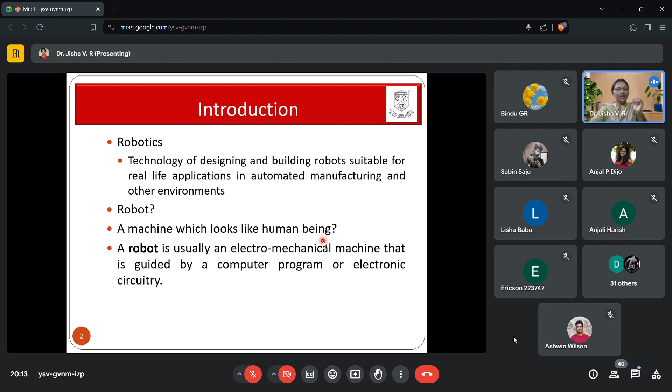So what is basically a robot? Generally, when we are in school, when we are beginners in robotics, what comes to our mind when we hear the word robot? Is it a machine which looks like a human being? In my school days, when I heard the word robot, this is something which came to my mind. Okay, so it's only a humanoid robot like that. So this is basically only one class of robot.

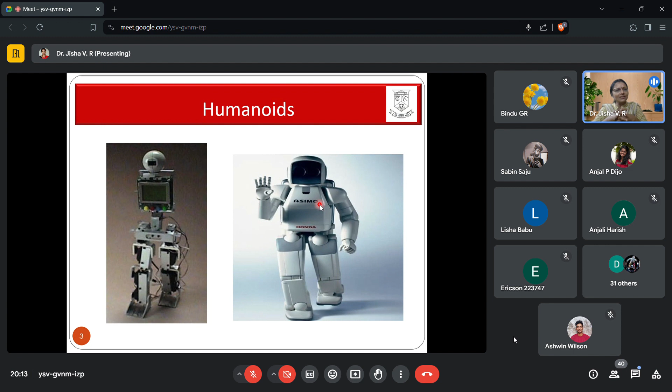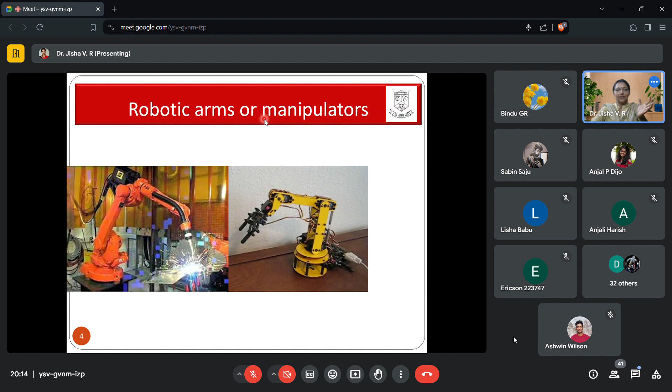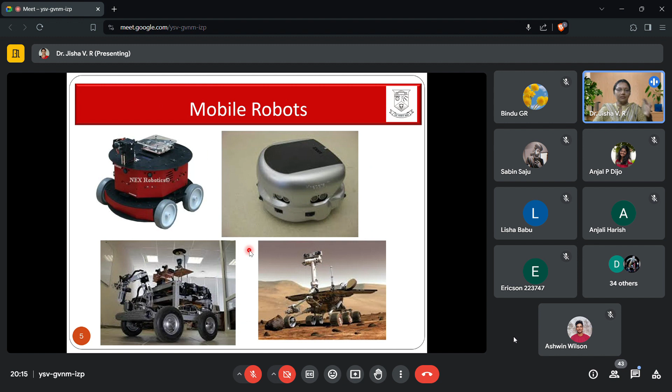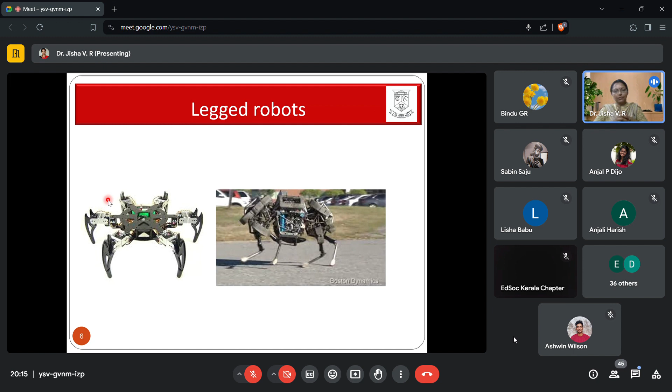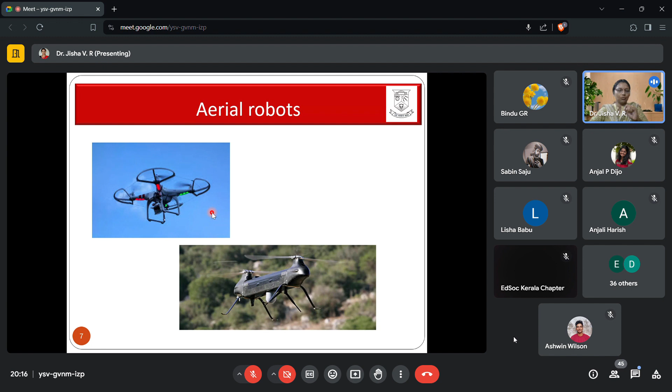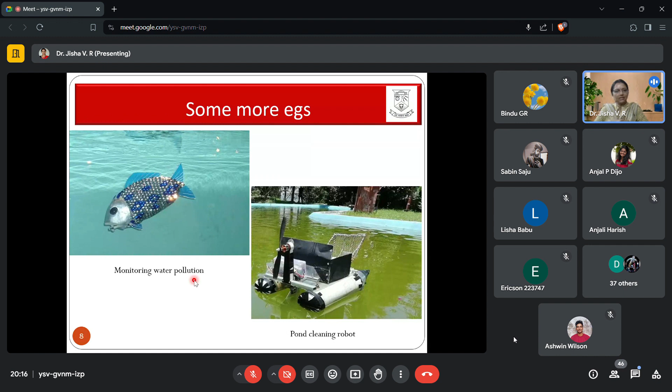Okay. And this is the last group of robots which I have included in the presentation, the robots which are moving in water. This is actually a pond cleaning robot which is moving over the surface of water, but it can go deep inside and do some analysis or monitor water pollution. So what I wanted to convey is that not all robots are human-like. There can be configurations like these, and many more configurations as well. I have not included all the robotic configurations. Okay.

So what is basically a robot? In simple terms, we can say that it is an electromechanical machine. It has a mechanical structure, and we will write some program, or there will be some electronic circuitry which is used for controlling this robot. This robot can be semi-autonomous or it can be autonomous also. If we are using only electronic circuitry, it will be semi-autonomous, but using computer programs, we can make this a fully autonomous robot.

So where has this word robot come from? It has come from the word robota, a Czech word which means forced laborer. If you look at the robotic population worldwide, they are all used as laborers, and population wise, what do you think? Can anyone say? I have shown different robotic configurations, right? Starting from humanoid, then the manipulator, then wheeled mobile robots, legged configurations, and the robots which are moving in water. Among these, population wise, which one is dominating? Can anyone say?

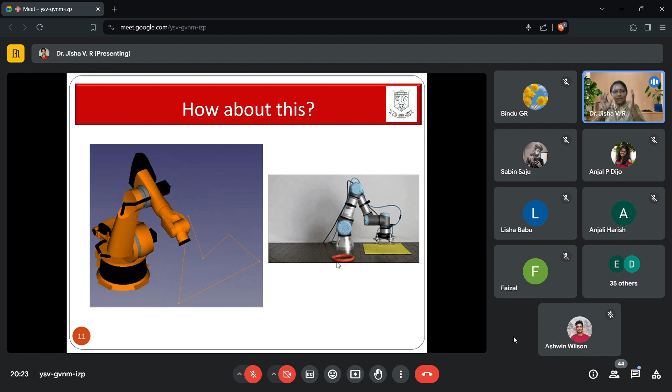So whenever we are designing a robot, if it's a robotic manipulator, it should satisfy the requirement. It should not be like that. Wherever I wish to keep the object, point A, B, C, D, I should be able to do that. So your robot should be able to do that.

Another example: this is a line follower. Many might have seen that. Many might have built line follower robots also. What generally people do is, there'll be a line marked on the floor, and the robot will be designed to follow this line. But I'm imagining a line on the floor in the room where I'm sitting. It's just imagination. There is no line over there. Will I be able to move the robot through that straight line?

And suppose I'm thinking of moving the robot through a circle, somewhat like this. Will I be able to do that without drawing a circle? You should be able to do that. Some of my BTech students did this project many years back, where the robot is moving through a circle. If you look at this, this robot is moving through a circle, and there is no circle drawn. So how is this achieved?

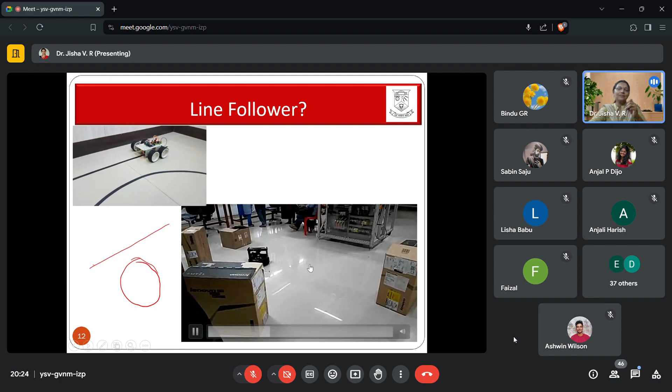Okay, so if you know a little bit of math, you will be able to achieve this task. Another common task which is taken up by UG students is the obstacle avoidance robot. What they'll do is they will generally use a sonar sensor, or initially they start with an IR sensor, or they may integrate a sonar sensor or laser rangefinder. So see how they are doing obstacle avoidance.

Suppose the robot is moving forward like this, and when an obstacle is encountered, the robot takes a right turn or a left turn. So that will be their algorithm. Is that what the robot is supposed to do? No, right? Because this robot will be assigned to do some task. Maybe the robot has to move from point A to B. While moving from A to B, it encounters an obstacle, and now it has to overcome this obstacle and reach B. So can this be done?

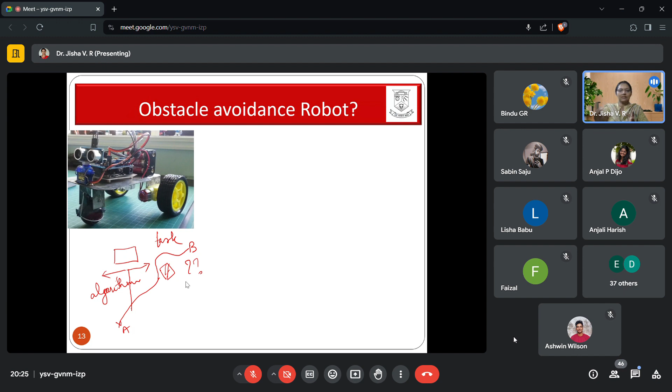That should be in our mind, rather than, when the obstacle avoidance robot is built, just taking a left turn or a right turn, wherever it will go. Are you thinking of the destination point also? Whenever we are thinking of building an obstacle avoidance robot, we should think of this aspect as well. If you look at this, this is a start point in a scenario, and this is a goal point, and there are some obstacles, but this robot is avoiding all the obstacles and reaching the destination. So whenever you are building an obstacle avoidance robot, you should also think in this way.

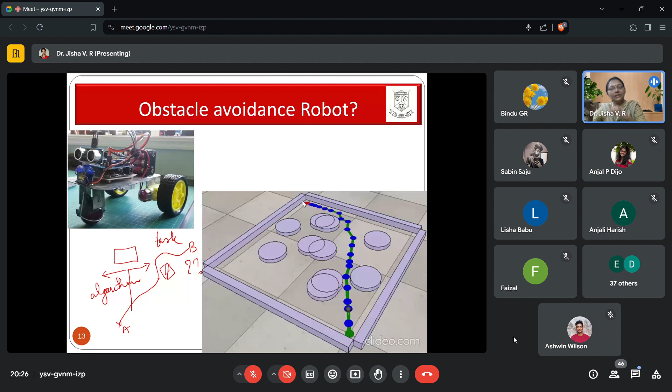And the next level is, all these obstacles are static obstacles. Suppose the obstacle is moving, then how to avoid that and move forward. All these things should be in your mind whenever you are working with robotic projects. So can we claim robotics belongs to only one particular engineering discipline? No, right? It's an interdisciplinary area where anyone will be able to contribute, whether you belong to mechanical, electrical, electronics engineering, or computer science, if you wish to work in robotics.

Now, suppose I am basically from an electrical background. Generally, I will not be much interested in the mechanical design part, or I will not be aware of that. And once the robot is available, I know how to control it to move from one particular point to another, or how it can be moved through a particular trajectory. That I will be able to do.

And being an electronics engineer, you will be able to add more sensors. Sensor integration or sensor fusion can be done, and image processing also. If you are using a camera as a sensor, that data can be manipulated and obstacle avoidance can be done. An electronics engineer will be able to contribute all those things. And a computer science engineer, whenever we come up with an algorithm, will be able to design an optimal program for controlling or achieving all these tasks. So anyone in this group will be able to contribute.

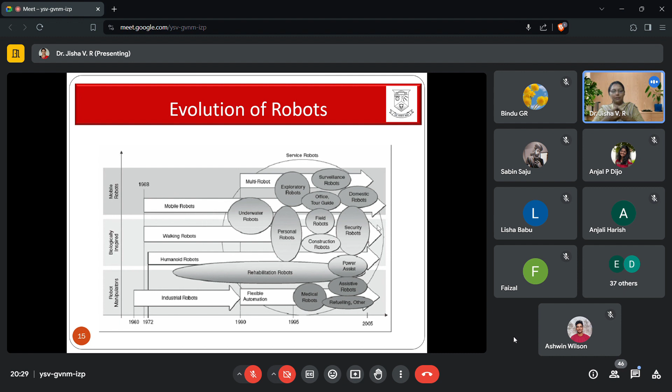I'll give you some brief about the manipulators, like what are its parts and some basic math, so that if you are interested in working deep in these manipulator robots, you will be able to do that. If you consider a manipulator or robot arm, it is very much similar to human upper limbs.

A manipulator or robot arm is generally defined as an open kinematic chain of rigid links interconnected by movable joints, meaning it is open to move. Only one end is fixed, the other end is moving, so we call that an open kinematic chain. But if both ends are fixed and the part in between is moving, then we call it a closed kinematic chain.

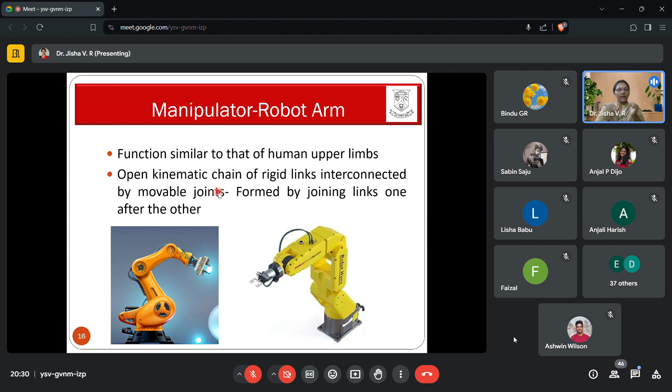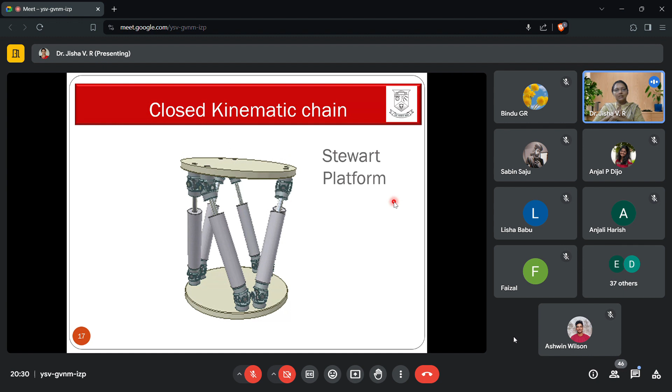This is another configuration which we call a closed kinematic chain, the very famous Stewart platform, which is basically used for simulating space-like environments. So this platform is generally used. That's the classification of closed and open kinematic chains, and some terminologies also I will mention.

If you consider a manipulator, it has links, joints, and other structural elements. End effector means the part which is connected last, the last link of any manipulator, I should say.

Actuators means which is causing the robot to move, so we call them muscles of manipulators. Muscles can be servomotors. See how beautifully we move our hand, right? But when we think of replacing this with a motor, we'll understand how difficult it is. So we can use servo motors, stepper motors, and in some cases, hydraulic or pneumatic actuators.

In the car manufacturing industry, the payload to be manipulated is a car, so you can imagine the weight. An ordinary servo motor or stepper motor will not be able to manipulate that payload, only hydraulic actuators will manage that. In some scenarios, like food processing industry, we can't employ hydraulic actuators because there can be oil leakage. So in those scenarios, we go for pneumatic actuators, which are air actuated, while hydraulic actuators are oil actuated.

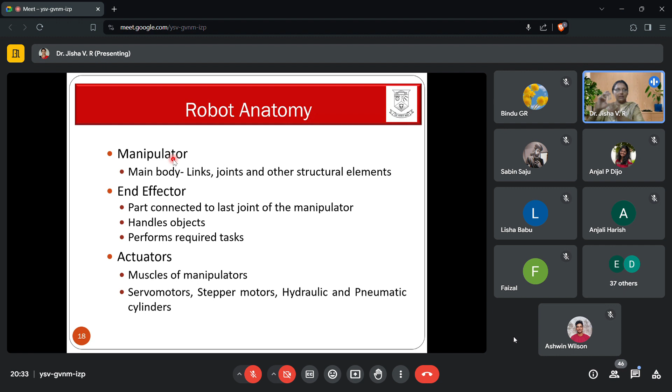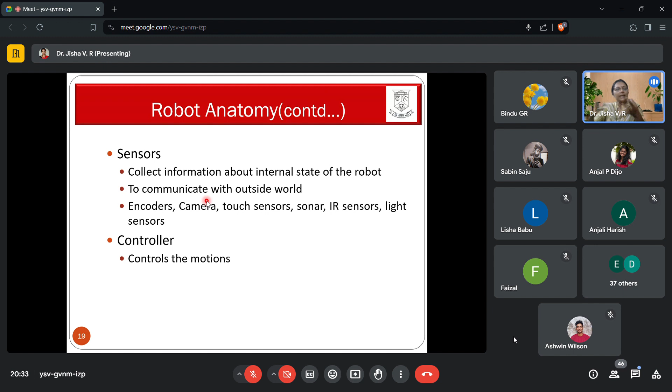Because of continuous rotation - in a manipulator, it's just theta control, just angle control: theta 1, theta 2, theta 3, like that. But in a mobile robot, the velocity of the motor is to be controlled. A mobile robot will also have sensor control. So sensors, controller, and actuators are common in all the robots we work with.

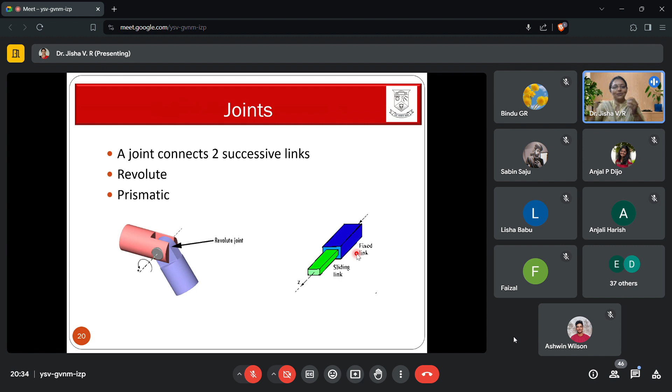In a manipulator, as I was mentioning, there are links and joints. The joint connects two links, and there are two types of joints: one is called revolute joint, another is called prismatic joint. Revolute means all our joints in the body are revolute joints. Prismatic, in some applications we may need robots with that, but for us, all the joints are revolute joints only.

And these are some terminologies, standard terminologies if you wish to work with robots. The first one is work envelope, meaning it is a locus of points in 3D space where the end effector can reach. This is very important - the robot is going to do pick and place, so is it going to work inside a rectangular box?

Is it going to work inside a cylindrical envelope? Or is it going to work inside a spherical envelope? You should have an idea, because suppose there are parts which are moving on a conveyor and the robot has to pick and place at some point. Where the arm is moving, you should have an idea. What should be the work envelope? Should it be a sphere? Then what should be the robotic configuration? That is how you decide.

Based on the application you are working with, you need to choose that particular robotic configuration. And how the work envelope looks like is decided by the first 3 joints, or major axis of the robot, and the remaining joints are called minor axis of the robot. So how the work envelope looks like is decided by the major axis.

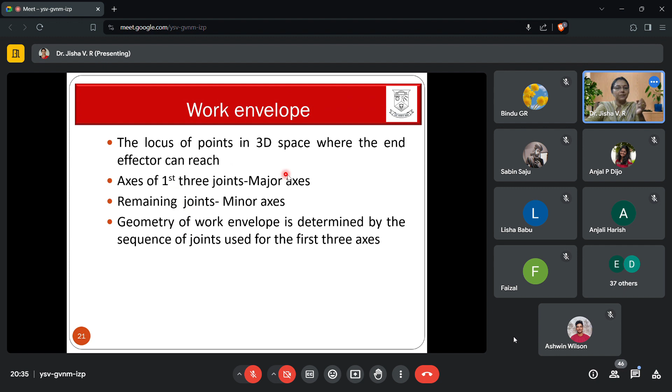These are the common configurations. This is a rectangular box-like work envelope, meaning the end effector will be able to move within that rectangular box. This is a cylindrical configuration wherein the robot end effector will be able to move within the cylindrical envelope. This is called spherical, and this is called articulated.

So if you want a box-like configuration, we go for this robotic configuration, which is called Cartesian, PPP we call it. The next one is cylindrical configuration, which is revolute prismatic prismatic, yielding a cylindrical work envelope. Next is spherical, which is revolute revolute prismatic. And the last one is articulated, meaning RRR.

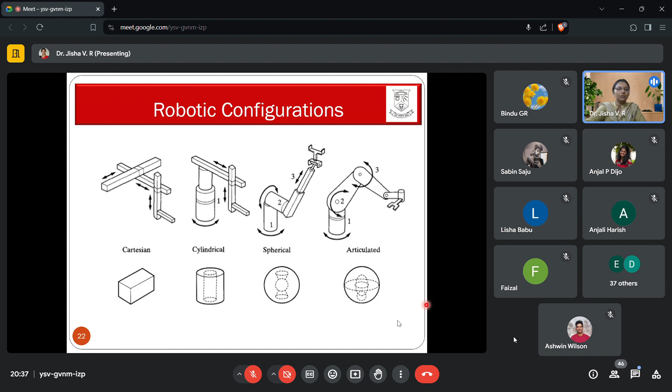So suppose you are asked to automate a process. In this era, you don't have to design a robot for that particular task. What you may have to do is decide which configuration to opt for, for automating this industry. So we may have to choose, because these are all standard configurations, and from that you will be able to choose which one is suitable for your application.

And this is also another famous concept in robotics, called degrees of freedom, which means the number of independent movements that can be performed.

For example, if the degrees of freedom of a robot is less—suppose you have a pen like this, and the robot has to place the pen at this point, the position is okay, but sometimes I may have to hold the pen like this, like that—so the orientation is different. If the robot has more degrees of freedom, meaning more joints, you will be able to position and orient the end effector at any position and orientation.

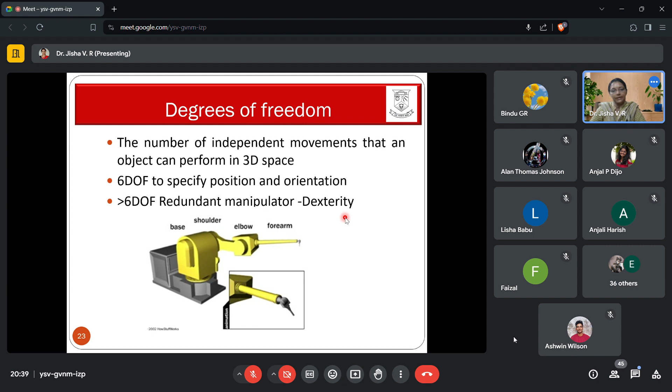And if the degrees of freedom is more, we say the robot is more dexterous, or the dexterity is more. That means, suppose an object is kept inside a box—ordinarily it would be kept on the table, and then it can pick and place like that. But if it is kept inside a box, it has to overcome the obstacle, go inside and pick. If it is having more degrees of freedom, more joints, it will be easily able to pick that. So that is called degrees of freedom.

If you look at our hand, see how God has blessed us with these many degrees of freedom. That is why we are able to do so many things, like seeing dancers and what all things they are doing. If you think of designing an arm capable of doing the typical Bharatanatyam mudras and all, this is going to be really very challenging. We are blessed with so many degrees of freedom in the human arm.

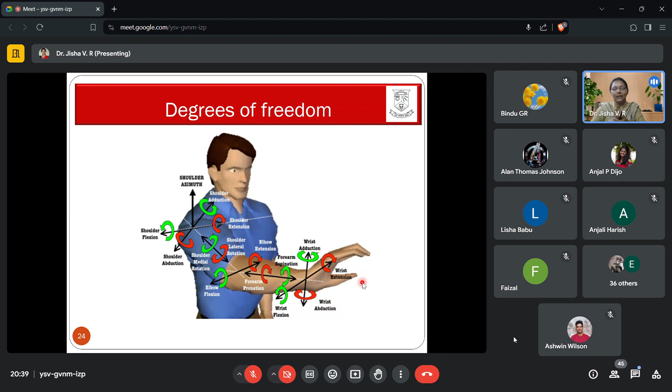When you are designing a robot from scratch, you have to know some mathematics called coordinate transformations, because coordinate transformation means, suppose if you wish to specify the position and orientation of the end effector—the speciality of an arm is that when this joint is moving, this link is moving, this also is moving. So simultaneously, when these two are moving, what happens? How to find the end effector position?

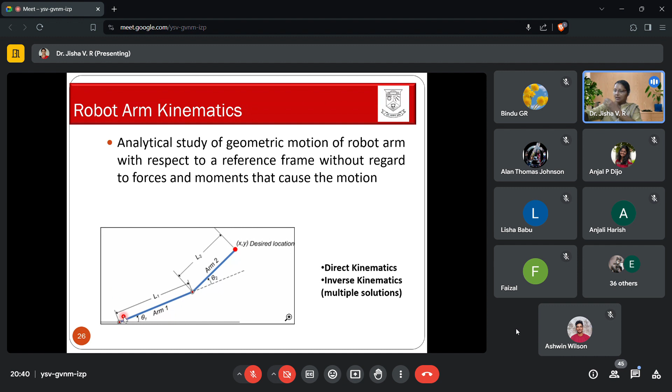For that, we make use of what is called coordinate transformation. What we generally do is assign frames: one fixed frame here, one frame of reference here, one frame of reference here. First, I'll find the position of this movable frame with respect to this one, then with respect to the next, find the transformation, and then find the product, so that I will be able to find the end effector position with respect to the base. So this helps in finding that.

If you wish to design a manipulator, then this will be of use for you. Otherwise, you can just choose a configuration and work with that.

Two more terminologies I will explain. One is called kinematics, also called robot arm kinematics. This means it is a study of motion without considering forces and moments. For example, if the arm is simply moved without taking a payload, then kinematics is going to help us. But if the robot is taking some 10 kg payload, then this study will not help, so then I have to go for dynamics. Dynamics is the study of motion considering forces and moments. So kinematics means without considering forces and moments, and dynamics means considering forces and moments.

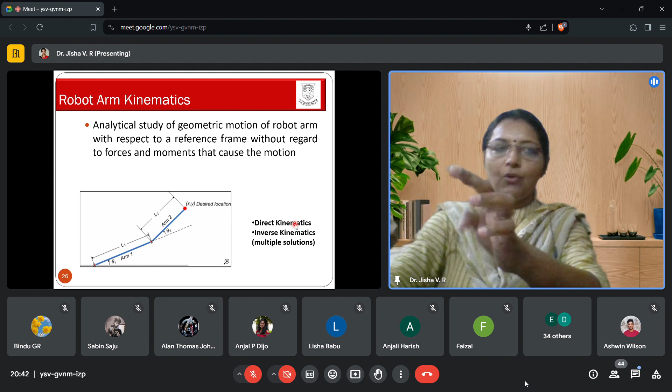In kinematics, there are two terminologies: one is called direct kinematics and another is called inverse kinematics. Direct or forward kinematics means if you know the joint angles, how to find the end effector position. So if you know theta 1, theta 2, theta 3, what is the end effector position? Inverse kinematics means you know the end effector position and find what is theta 1, theta 2, theta 3.

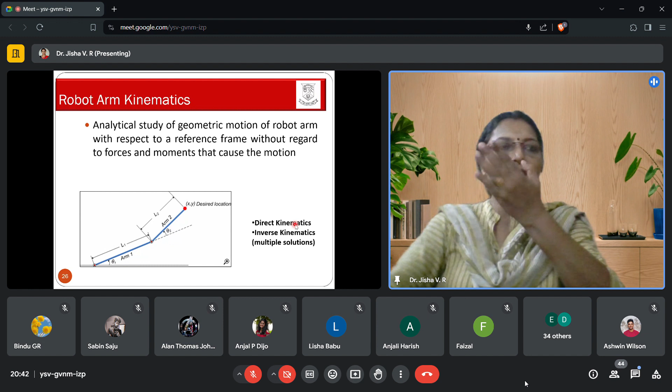This is really needed when you wish to move the arm through a particular path, where the end effector has to move. So if this is the point, what should be theta 1, theta 2, theta 3? If this is the point, what is theta 1, theta 2, theta 3? You need to control this in such a way that at each point, this inverse kinematics is to be solved. Then only will you be able to do that.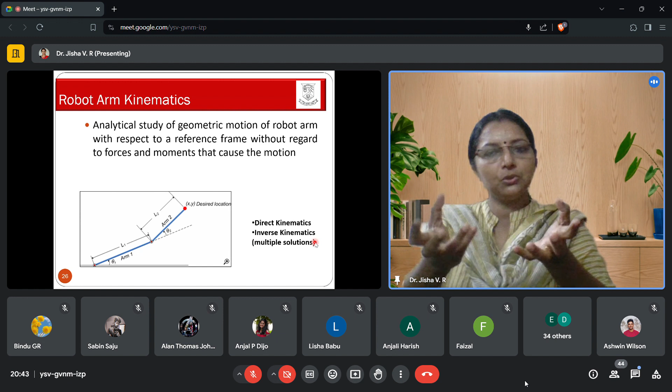There are some terminologies, I'm not going into the details of that. So this is actually a typical illustration of frame assignment in a robot and finding the end effector position.

This is what I was explaining, which is called robot dynamics. If the robot movement is to be studied considering forces and moments, then we work with robot dynamics. I will explain this once again with respect to a mobile robot.

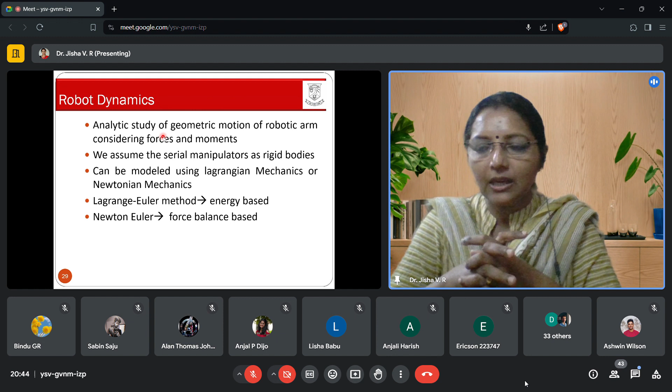For example, suppose you are asked to design a robot in a hospital or in an office. Initially, the robot has to move from one room to another, and the payload taken by the robot is very less, less than 1 kg. Just imagine. In that case, you can work with kinematic based analysis.

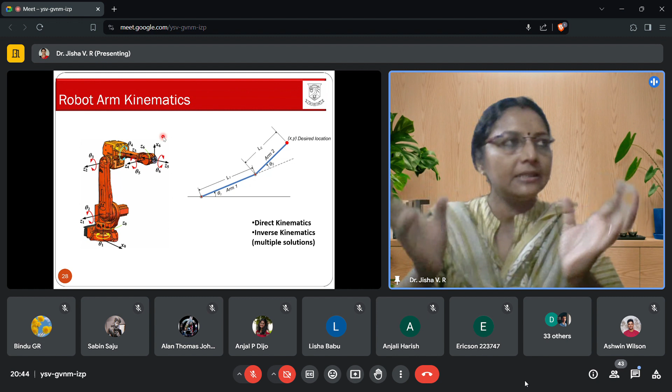But suppose if you are designing a robot which is moving from one room to another taking 10 kg payload or 50 kg payload, in that case, for analyzing or designing a controller, you have to do the dynamic analysis. That means you need to consider the model which takes into account forces and moments. Otherwise, you will not be able to move the robot to a desired position.

The robot will not reach it. For example, once again, if you are not clear with that, let me explain. In the first case, if the robot is controlled by kinematics based control, the payload will be very less, maybe 1 kg or less. In that case, what you have to give as control to the robot are the left wheel and right wheel velocities.

Okay, but in dynamics, it is based on, see, some customer will come and ask you, okay, design me a robot which can take 50 kg payload. So suppose he is asking you to design a robot which can take 50 kg, then what you have to do is, it should not be the velocity control. You need to design a controller such that the controller should be able to find what is the right wheel torque and left wheel torque.

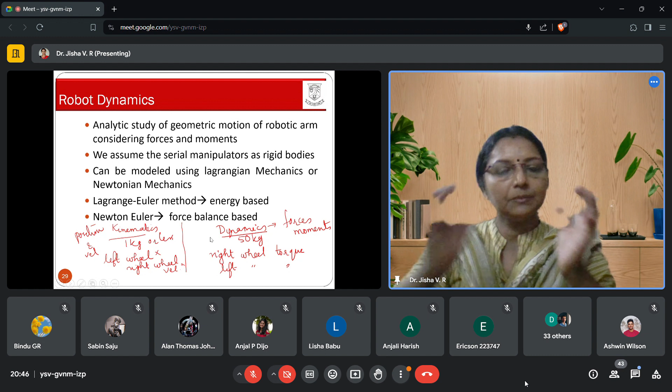Okay, so for this, you have to take the dynamic model where the forces and moments will be coming in picture, but here only position and velocities will be coming. Okay, position and velocity. So that means exactly you will be able to control the robot in these two scenarios. So that is the importance of knowing kinematics and dynamics.

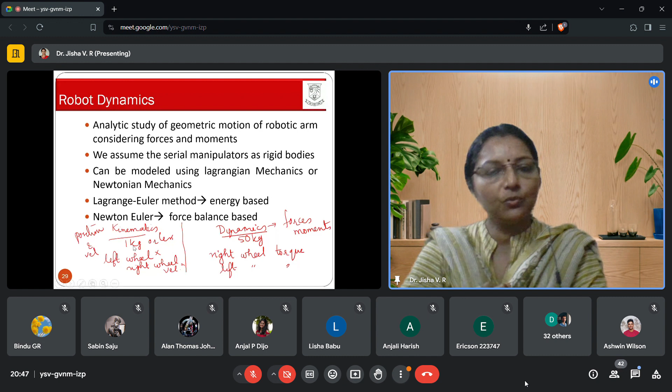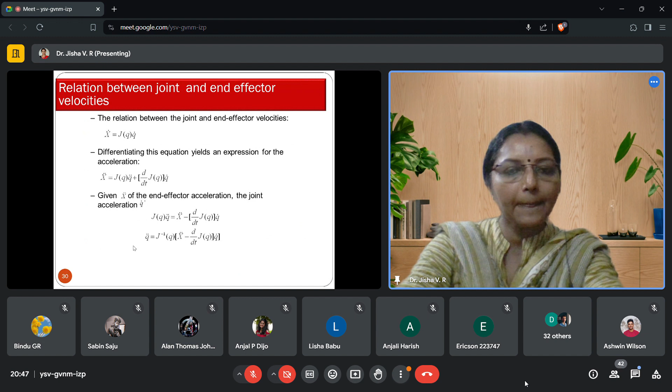Someone is asking you to design a robot, like suppose if the payload is less, you don't have to go for a complicated model. You can just work with this simple kinematic model, and then you will be able to make the robot work, or make the robot autonomous. Okay, and I have some more basic terminologies I will explain, and then I'll go to the design of a robot. That also I have included in the presentation.

So see, after knowing the kinematics and dynamics, what generally you do is trajectory planning. Trajectory planning means the task description. That means given the task description, a path or a trajectory will be given to you, and sometimes you may have to find the path. Sometimes the path will be given to you. Okay, so once the trajectory planning is done, that's the first step.

After kinematics and dynamics, you need to plan a trajectory, and planning the trajectory is important because there will be some constraints because of the kinematics and the dynamics. There will be some path constraints, and because of that, the path generated will be different for different robots. So that is why trajectory planning is important.

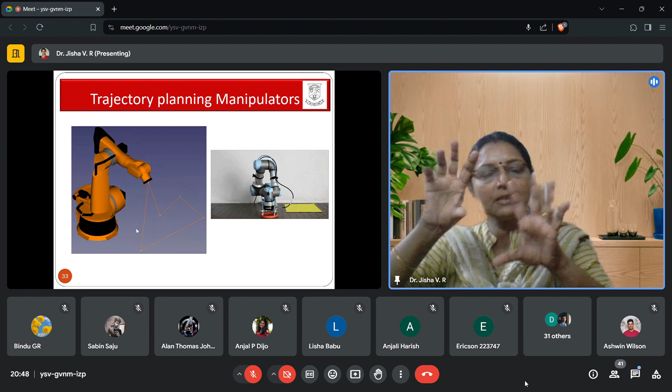So once the trajectory is planned, then we have, see, this is the path to be followed, and how to control the robot in such a way that it follows a particular path. Okay, so that's the next step. See, this particular path is shown, and the robot is made to follow this path. This reference path or trajectory is available, and we'll design a controller so that it moves through this path. So this is another scenario.

Okay. So once this trajectory is planned, the problem of issuing commands to the joint actuators that will cause the manipulator to faithfully track or follow the planned trajectory is called the robot control problem. Okay, so suppose the robot has to follow this path. Then if that is to be done, what is trajectory planning?

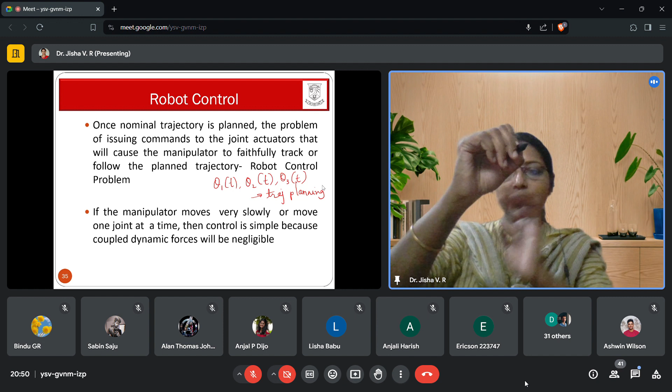Trajectory planning means I have theta1(t), theta2(t), theta3(t). So finding the joint angles, suppose there are 3 joints, theta1(t) to theta3(t). This is called trajectory planning, the first step. Once I know that, then how to track that? If the end effector has to be at this point, what should be theta1, theta2, theta3? The control commands are to be given such that these particular angles are reached. Then I move theta1, theta2, theta3.

Okay, so this is the last part. Once all these tasks are done, once the control is also completed, the robot will be able to follow the desired path or accomplish the task.

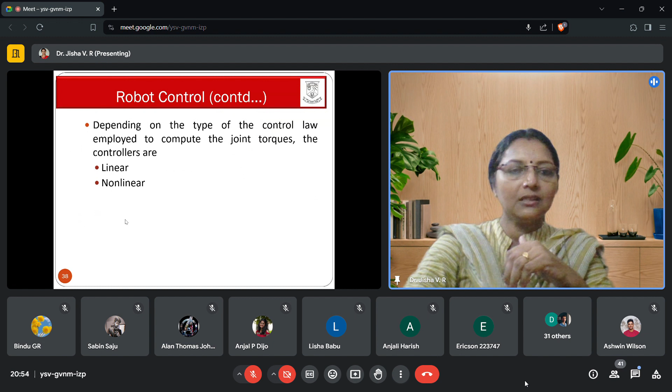See, here I have written controller, but that doesn't mean that it's just a PID controller or PI controller. It can be an intelligent controller also. So if your background is computer science, you can think of AI based algorithms which are capable of achieving the desired task. Ultimately, that is what we have to do, right? So in the first part, I wish to cover only up to this.

If you have any quick questions, I am ready to answer. I think it's almost time, right? I have one more design presentation. If you have any quick doubts, I can answer and then go to that. Any quick questions? Okay, can I move on or do I need to conclude? I have one more presentation because there will be some students who wish to start working with robots, so I have just taken a design example. Do I have to explain this or shall I conclude? Ma'am, you can continue. Okay, maybe I'll just try to conclude in 5-7 minutes.

So this is how you can start working with the design and development of a robot. It can be any robot. What I have taken up to present before you is the design and development of a mobile manipulator. Mobile manipulator means it has a mobile base and a manipulator. It's not as simple as a mobile base and a manipulator alone; it combines both. So how can you start with that?

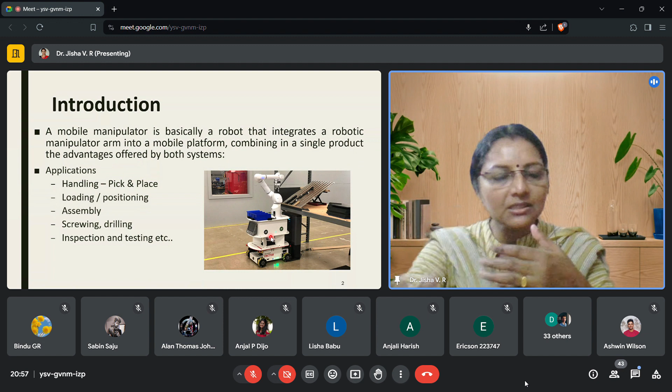Whenever you are asked to design a robot, first do the mechanical design. If you wish to work in robotics, it is better to have an interdisciplinary team, so that there will be contributions from all of them. The first part is mechanical design, then comes the electrical and electronic design, then the control part, then testing, and finally the hardware implementation. So how can you start with the system design, the mechanical design? There should be a mobile base; you need to decide whether to go for a 3-wheeled or a 4-wheel configuration.

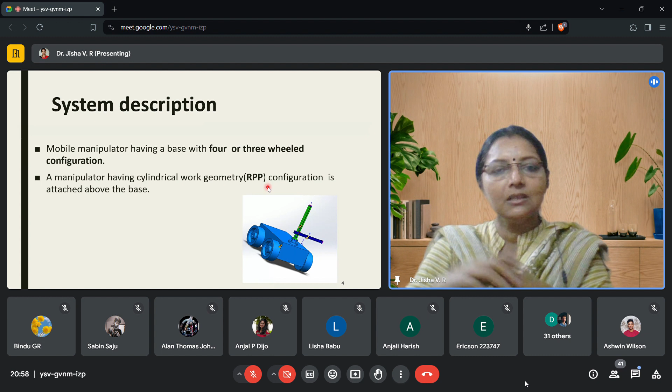So maybe as a beginner, what we'll do is we'll just think of a 4-wheeled or 3-wheel configuration, in which only 2 wheels are driven and the other 2 are just supporting. Okay, and then what should be the arm? The arm can be very simple. It's not just PPP. Let us go for RPP. Okay, so it's the cylindrical work envelope. So RPP means cylindrical. So that kind of a configuration is assumed, and it's proceeded.

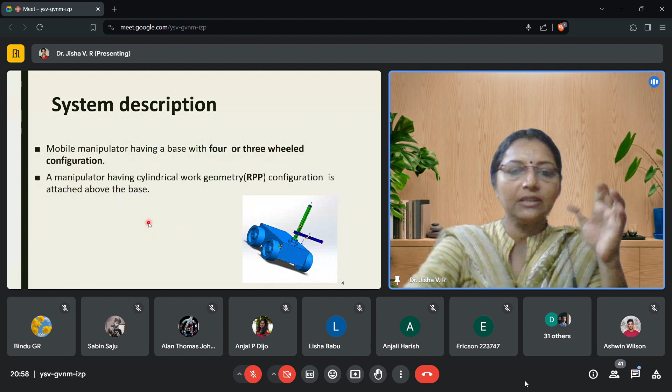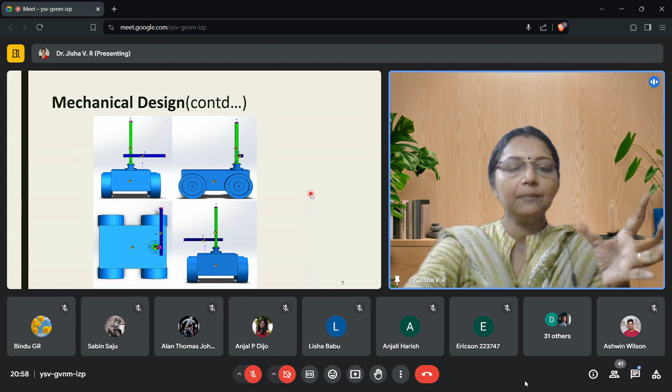And then how we can do the mechanical design. So for that there are so many components associated with this. All these designs can be done in SolidWorks. So you can just start working in SolidWorks and design all these components, see all these components and see the dimensions also. And then all these are integrated, and then you need to just start testing that.

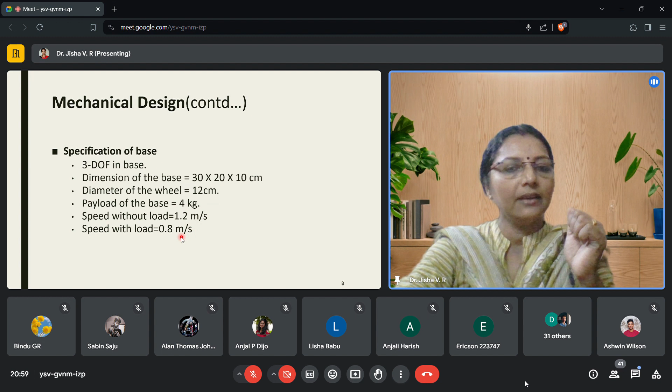And then you should have an idea, okay, what should be the base dimension, what should be the wheel dimension, how much payload the robot can take, what should be the speed of the robot, and what should be the speed with load. All these things should be in your mind when you are designing. Then only you will be able to choose the motor.

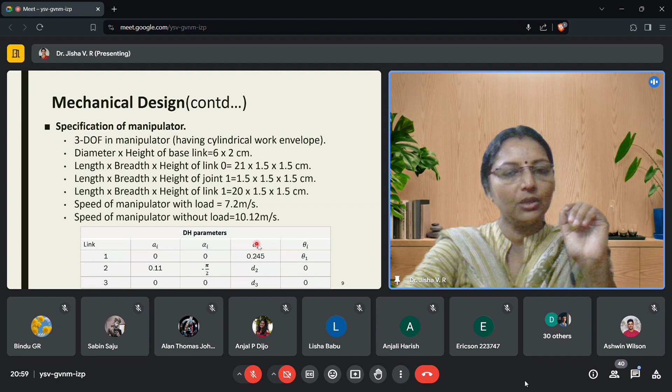Okay, and then you have the link. So first one is the base, then you have the link. So what should be the link dimensions, and what should be the speed of the manipulator, with and without load. And this I'm not explaining because it will take time.

And then the materials to be chosen for hardware implementation, whether I should go for aluminum chassis or 3D printed chassis, because if the payload is more, with 3D printed models you won't be able to do that. And all these things you need to work with. And then the first part is over. So you have designed the basic model in SolidWorks, the mechanical modeling is complete.

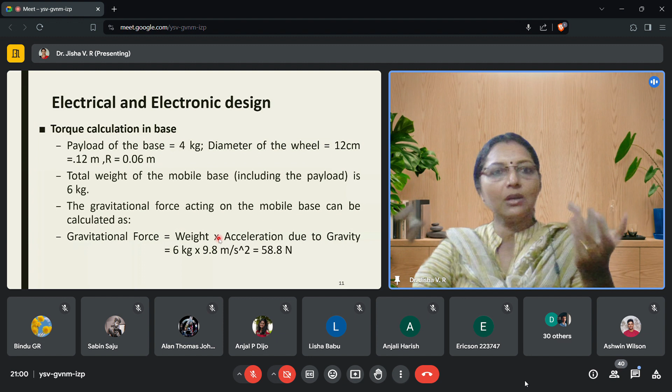Now comes the task of an electrical and electronic engineer. He or she has to find which motor it should be. Okay, what should be the torque of that, how to start work. So I'll just explain with an example. Suppose the payload is 4 kg and the diameter of the wheel is 12 centimeter, so the radius will be just 0.06, and total weight of the mobile base is 6 kg. So you can find the gravitational force as weight into g. So 6 kg into 9.8.

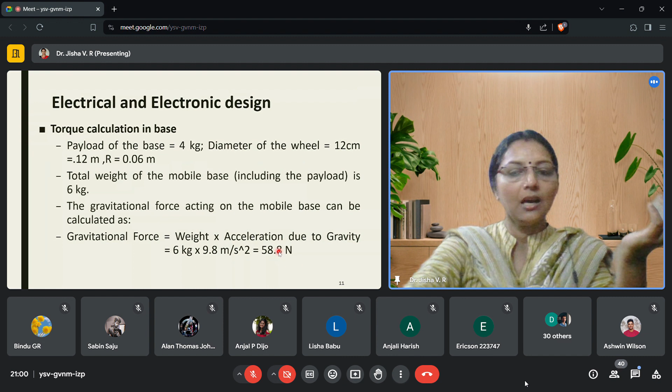So this is the total, but the robot actually has 2 motors. So that will be divided. The load should be divided among 2 motors. So you can divide that by 2. So it should be able to take this much Newton meter.

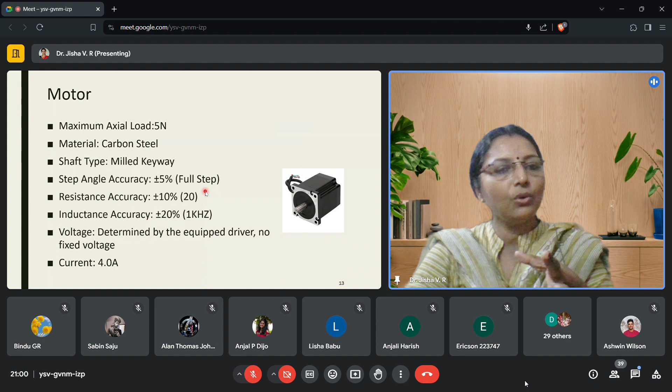So that is how you go and design or choose the motor. Okay, and then you need to calculate the torque requirements of the arm, because this is a mobile manipulator. And then you need to decide which sensors I need. Okay, only position sensors or velocity sensors, or I need to do some obstacle avoidance. So then which sensor do I go for? If I have money, I can go for a laser rangefinder. Otherwise, if the budget is less, we go for sonar sensors like that.

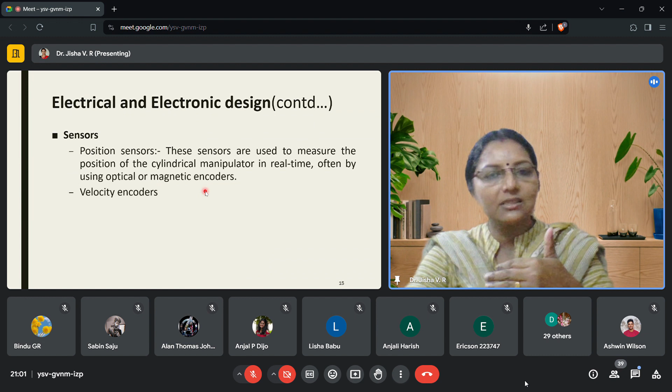Then we need to decide how the control is to be done. I'm not explaining the details of that. So we decided to work with the mobile manipulator. So that means the base has to be controlled first, and then after reaching a destination point, the manipulator can be controlled. Simultaneous control of base and manipulator will be difficult as a beginner. So you will be able to do that if they are done one after the other. Sequential control is preferred if you are a beginner.

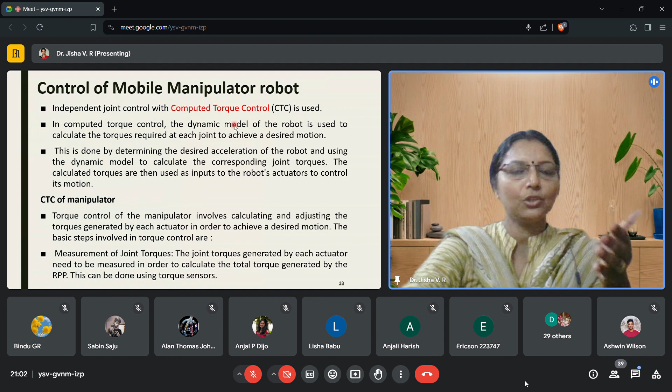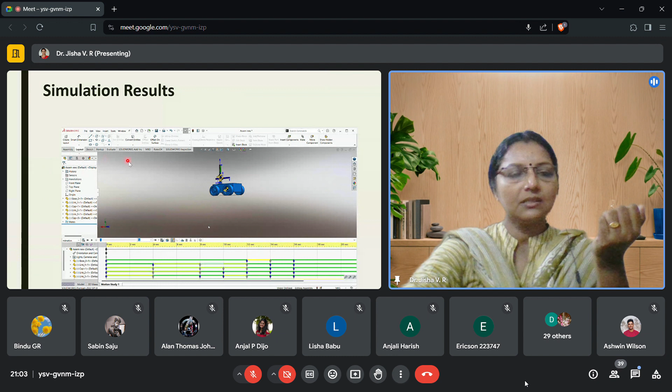So if you have to do this control, initially you need to do the modeling, and then only you will be able to work with this controller. And if the payload is 4 kg, you can't work with a very simple kinematic based model. You need to go for a dynamic model itself. So that is why the robot input is a torque. So then only you will be able to work with this model. And see, this is actually the simulation in SolidWorks, which was taken up as a mini project by some of my master's students.

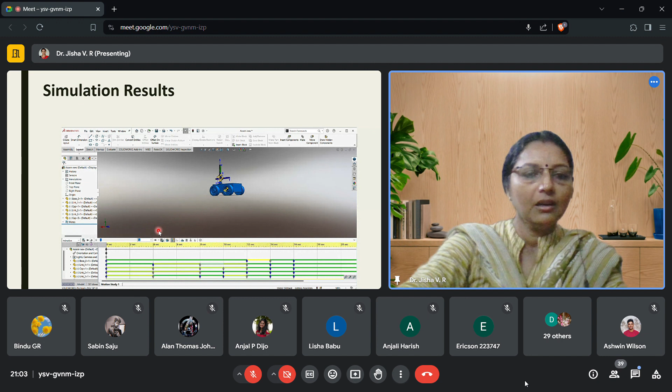So this is just a simulation in SolidWorks, how it works. So what I wish to convey to you is that if you wish to think of designing a robot from scratch, it's better to do these steps. Initially do the mechanical design, because you should have a plan. So initially do a sketch and then draw all these components in SolidWorks, integrate them and get the final model.

And then you decide which are the electrical actuators or electronic sensors needed for the application. That part I have not included separately as a slide. Now, ROS, which is called Robot Operating System, is a very good platform for doing the preliminary simulation analysis of this. So from the SolidWorks model, the URDF is to be generated. The Unified Robot Description Format is generated, which can be imported into ROS, and then simulations can be done. It is a very accepted software in the robotics area.

Instead of doing the hardware, if you are working with ROS, that is also acceptable. And then you need to do the trajectory planning. Once the trajectory is planned, the control is to be done. Here it is a mobile manipulator, so that's why it's written as mobile manipulator. It can be a quadcopter, it can be a humanoid robot, it can be a manipulator, or a pond cleaning robot, or an underwater robot. Whichever robot you are going to work with, all these steps work.